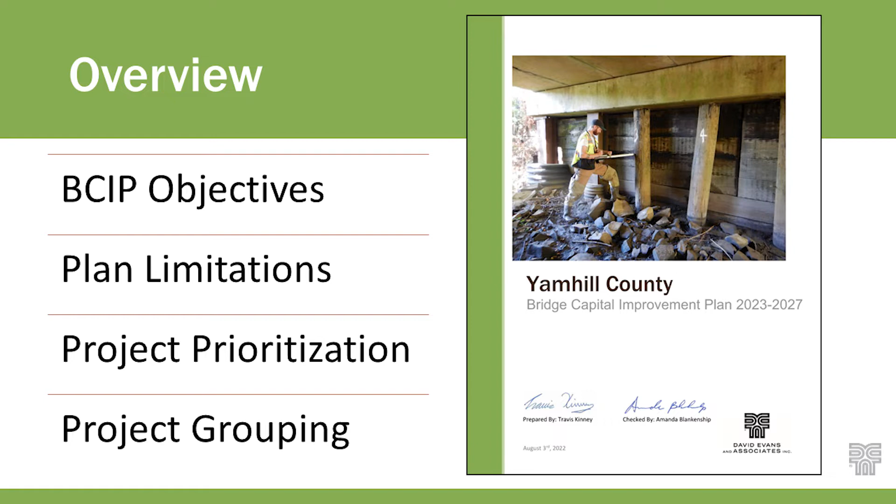As I mentioned, Yamhill County is a county in Oregon. They're actually nearby the office I work out of in Salem. They were able to be our guinea pigs on this.

Just on my soapbox here real quick, you don't really get rich as a consultant developing capital improvement plans. But for a lot of our bridge owners out here that are DOTs, you guys probably have a pretty robust programming unit taking care of all this, so it's probably not something you're thinking about a lot. But if you put yourself in those local agency shoes, a lot of times they're an army of one, or maybe they don't even have a single engineer on staff, and they're having to still manage all these assets. Local agencies own half of all the bridges in the country.

I felt really fortunate to be part of this, and that Yamhill County trusted us to help them with this. The way it came about is they were looking around and said, we've got to fix our bridges, and they weren't sure where to start. They reached out and said, hey, can you give us an estimate to paint this bridge? And I looked at that bridge and said, I don't really think you should paint that bridge. To be honest, I can give you an estimate, but I would prefer not to.

Can we talk about your project selection process? And that ended up being how we worked through it and said, okay, let's see if we can get a plan pulled together.

For a lot of the DOTs out here that have robust processes, I'd encourage you to reach out to your local agencies and consultant peers. I see this as a really needed resource for a lot of the locals across the country, and I use 'locals' broadly. I know there are some local agencies that rival DOTs, and some that are relatively small, running the whole gamut in between. So I'm not trying to pigeonhole that all local agencies need this kind of assistance, but I do see it as something that folks in this partnership could certainly help with.

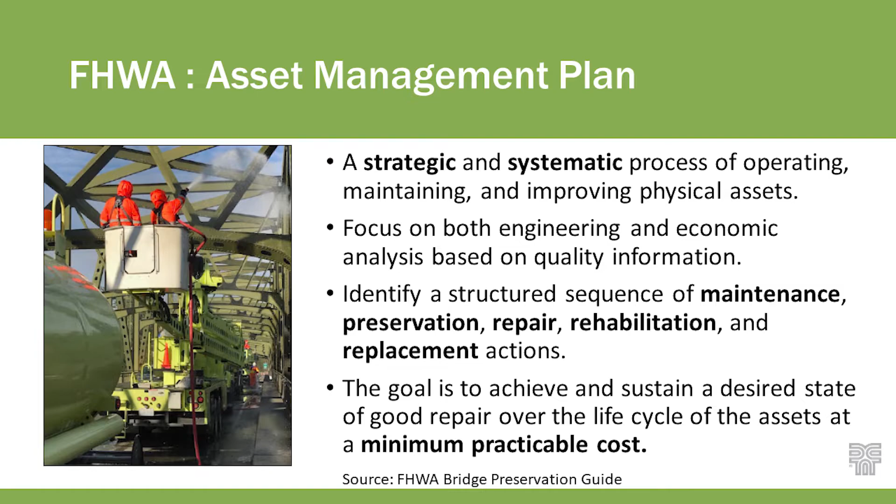Identify a structured sequence of maintenance, preservation, repair, rehabilitation, and replacement actions. You've got to have a balance between those, and I'll hit on that a few times. The goal is to achieve and sustain a desired state of good repair at a minimum practicable cost. We can all get behind that - I haven't heard anybody say, I have too much money, how do I get rid of it. And if you do, let me know, I could use that.

So here's the legs of an asset management plan: you've got your preservation, preventative maintenance, your rehabilitation, and your replacements.

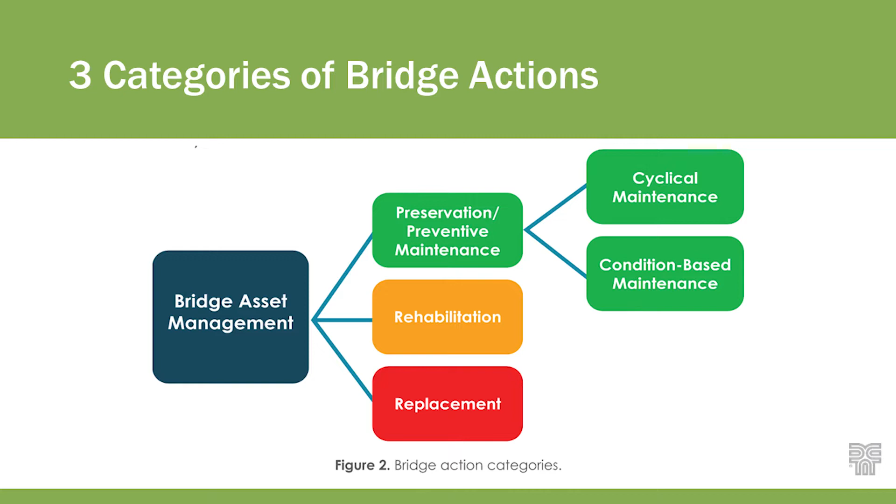Now, I know in this room, we really like to focus on the green one. In fact, we've even color-coded it in the good color of green at the top, and red, replacements, is the bad color. And then underneath the good color of green, we have the cyclical maintenance, and we have the condition-based maintenance. What I'm gonna say is, as we develop these capital improvement plans, you can't just spend all of your money on preservation, and you can't spend all your money on replacements.

And there's not a magic formula to tell you how to balance between the two, right? You gotta be able to look at the inventory and say, what are the inventory needs, and then how do I spread the funds out?

From there, we went and said, okay, what's the objectives? What are we trying to get through here? So we worked through with the county on this one and said, okay, we want to identify and address these highest risks of the inventory, right? This is an inventory that was a little bit neglected or had a lot of deferred maintenance for a while, and so there was some substantial or some significant risks that we wanted to get down in the near term.

We wanted to identify which bridges really should we stop spending money on, right? These are the ones that, boy, I could go and fix it, but there's still another 30 things wrong with it, and I'd just really like to see it go. And maybe we need to try and defer it for that replacement. How are we gonna prioritize these projects for delivery?

The purpose of this plan is to give you that long-term funding strategy, right? You're not looking at what can I do next in the 6 months, you're looking 5 years ahead, right? It starts to give you that longer range outlook. You have to have a plan that aligns with your available resources.

And so obviously this changes with every local agency or every bridge owner that's out there, right? You gotta have — if you have a plan that says you need $50 million to enact this plan and you have $5 million, you have $45 million worth of plan that's worthless. And so you gotta align with your resources.

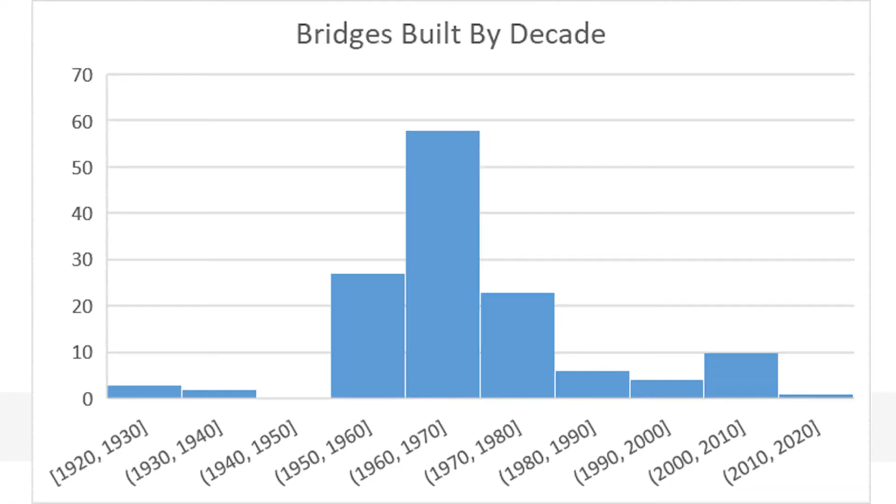This shows the number of bridges by decade. You can see that big hump there in the 50s, 60s, and 70s where they built a lot of their inventory during that time. And it's at that point where it needs a lot of work to keep it in service.

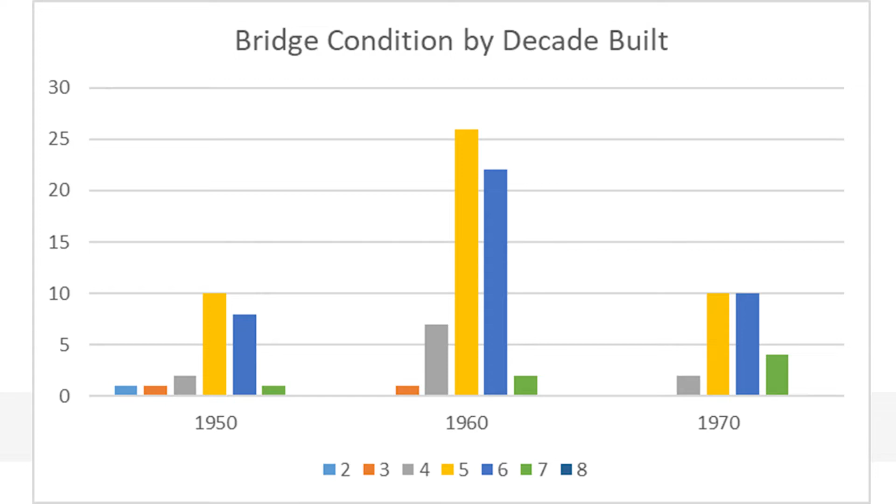We went through and started reviewing that, so that was kind of at the high level. Let's take a look at your whole inventory, but then you got to get down into the individual bridges as well. So we took that next step and started looking at inspection reports.

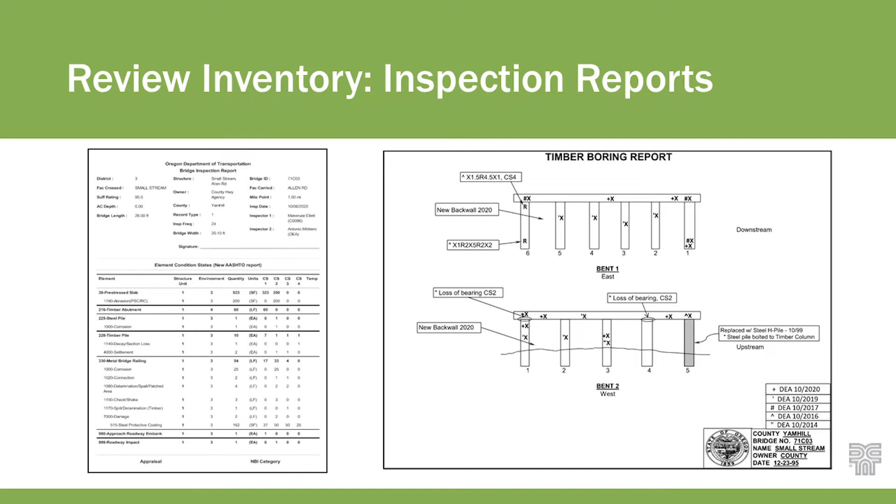And looking for those defects, timber boring diagrams - I have a lot of timber in the county - maintenance recommendations. I don't hear maintenance recommendations referred to a lot when developing asset management plans and capital improvement plans, but the inspectors go out and provide a great amount of information when they develop these, giving you a really good head start on some of these plans, some isolated repairs.

I was a little surprised at the volume. There's 613 total maintenance recommendations, and I was not really looking to go through all 613 of them. So we said, let's try and bracket this.

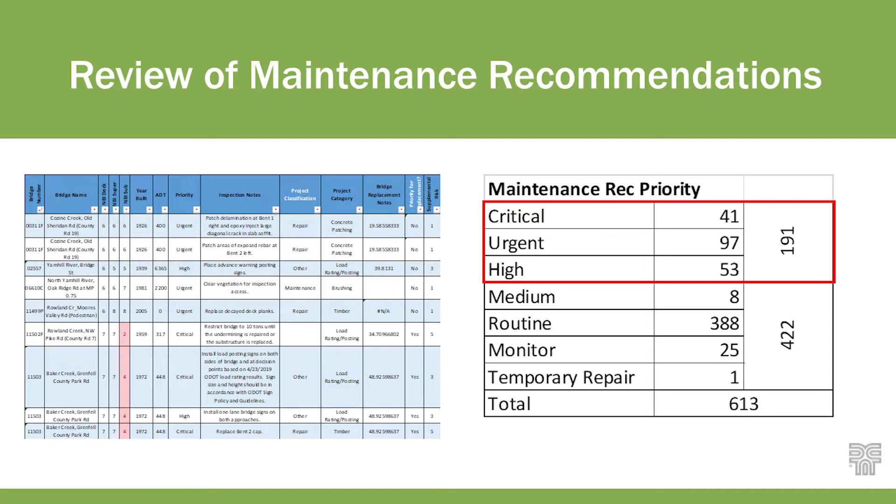What we said is, okay, let's look at these really critical ones. So you've got critical maintenance recommendations, you have urgents, and then in Oregon we break out routine into routine high, medium, and then just routine. The purpose of that is to give the end user of all that inspection data a little bit more granularity into what's going on in that routine inventory.

You can see that dropped it to 190-ish maintenance recs. That was a little more manageable. We said, okay, we'll go through those ones line by line.

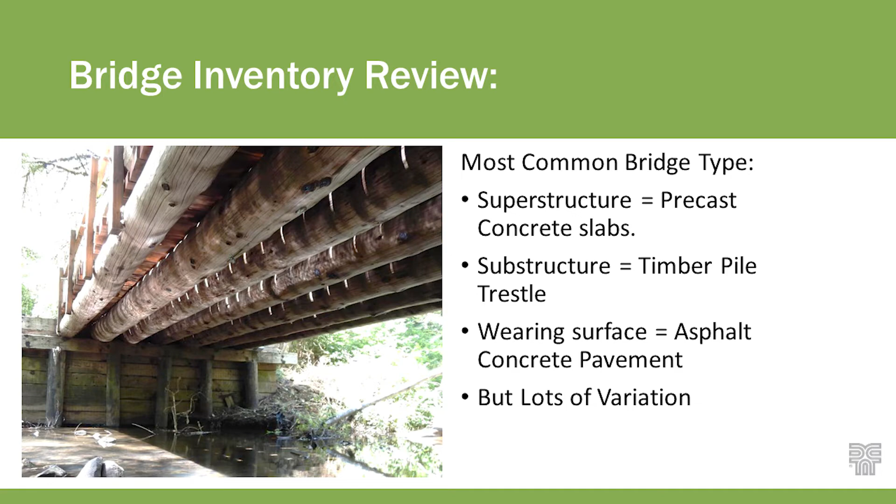But the most common bridge type is precast concrete slabs on top of timber pile trestles with an asphalt wearing surface, no waterproofing membrane. That was the bread and butter. Typically, the slabs have held up relatively well over time, and this timber substructure has not.

So that was kind of the bulk of it, and so we said, okay, well, I got 191 maintenance recommendations, I got all these different objectives of this plan. I'm still not down to a level of granularity where we can really pull together a tangible plan for them to take action on. So we said we need another ranking system to delineate between those 191 maintenance recs into a different kind of categorization. And so we went through that, assigned them a different risk-based kind of approach.

So if you have a whole bunch of urgent or critical maintenance recs, how do you delineate between which ones are the most critical versus the ones that are less critical? And so we went through that. This is a ranking relative to their population, and it's meant to kind of help rank between them.

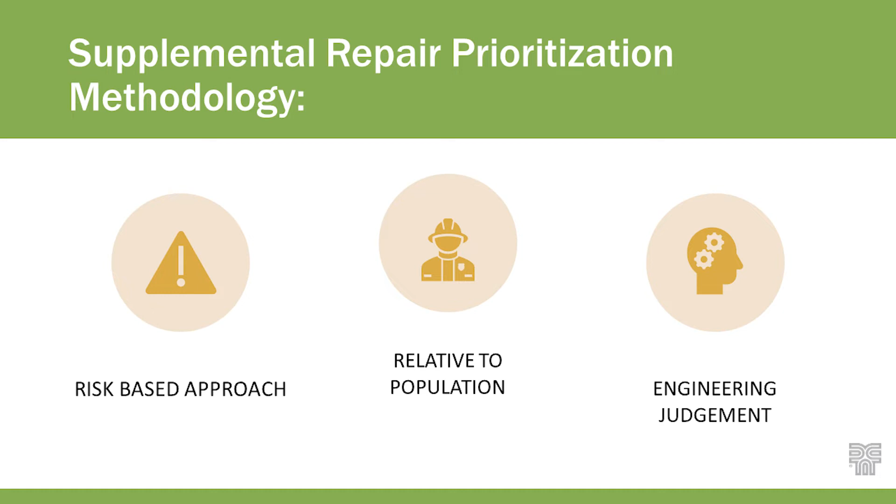So a 1 doesn't mean it's not urgent or critical, or that you don't need to do it at all. It's that it's the lower end of that particular population. And as I'm leading into this, a lot of engineering judgment went into this. Supplemental ranking was from a 1 to a 5.

5 was like, this is probably an immediate risk to public safety. It's not just a localized hazard. It could warrant a load posting. It could warrant something that needs to happen right away.

All the way down to a 1, which is not an immediate risk. A lot of these are like lack of inspection access - there could have been an issue there, but you couldn't see it because it was behind a bunch of blackberries. So it was like, well, yes, I agree with the inspector's recommendations, you need to clear that out. But it wasn't an immediate risk as far as that relative scale goes.

So we went through and sorted through those. You can see I went from 191 to 194 - if anyone's paying attention to the numbers, I just added a few as we went through there. But so we separated those out again, right?

And so now we're starting to get into a little more granularity. We got some ideas of, okay, these are the 16 that we want done right away, as fast as you can. And then we got these 25, 43, and others that we can start working into this plan.

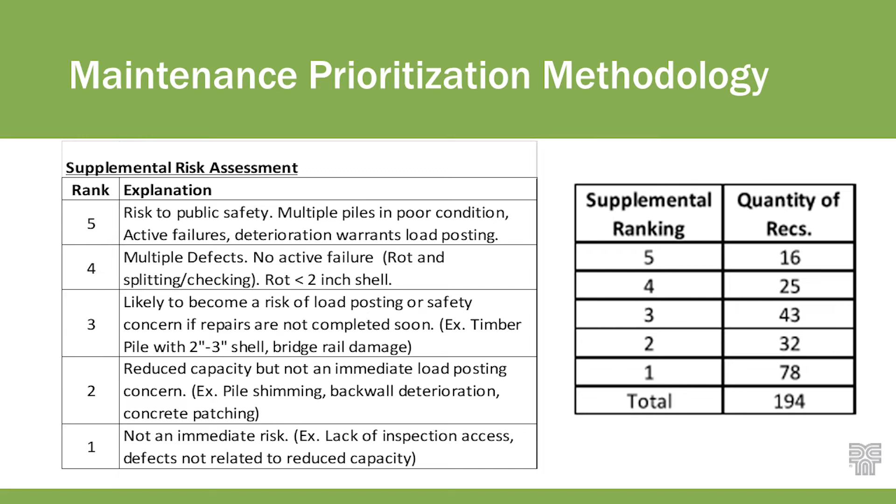What does a 5 look like? So this is a spread footing that has scoured out and started to have some actual signs of distress. You have this footing here, it's got these big diagonal shear cracks going here. The picture on the right shows underneath it, where you can put it all the way underneath. You guys saw the previous presentation.

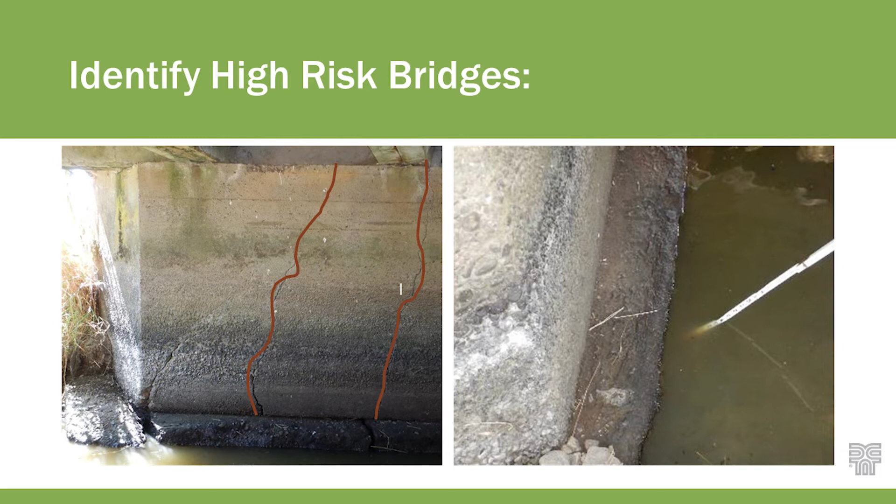I'm becoming more sensitive to scour issues lately, and that would be an example of a 5. Some other examples of that would be if you had multiple piles in a row that were really in bad condition - not just one, you have less ability to redistribute load.

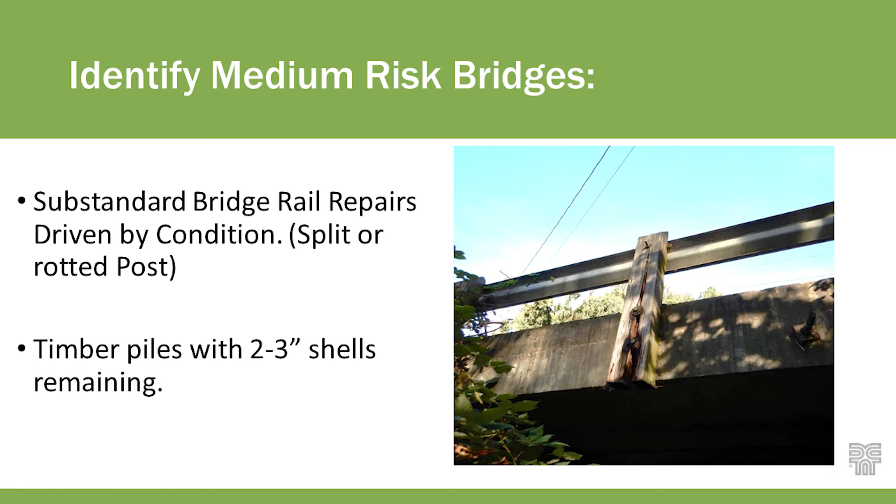A 3 might be more like you have a substandard traffic safety device - so you got a timber post behind a railing that's starting to fail, or you have a timber pile that's rotted pretty good, but not next to another pile that's rotted pretty bad as well. And then you get down to those lower risks like I talked about.

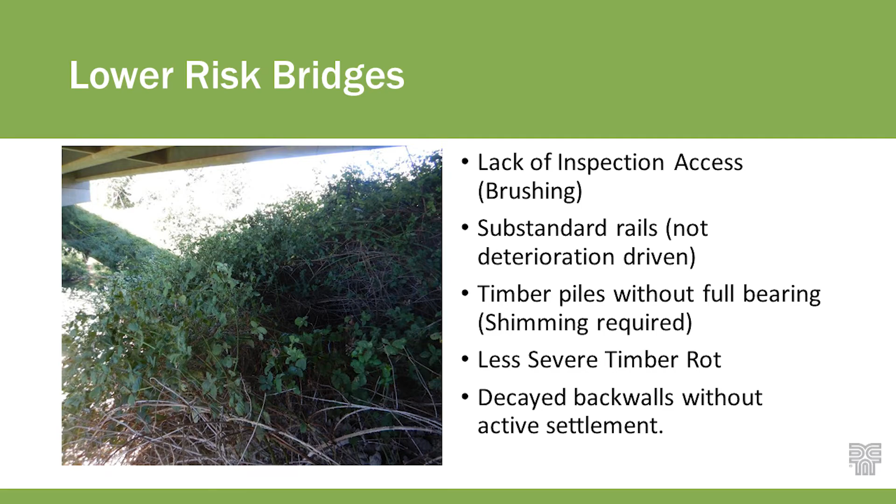So we got all those different rankings. I got a ton of data, I got a lot of spreadsheets going. I got to start getting into something that's actually useful.

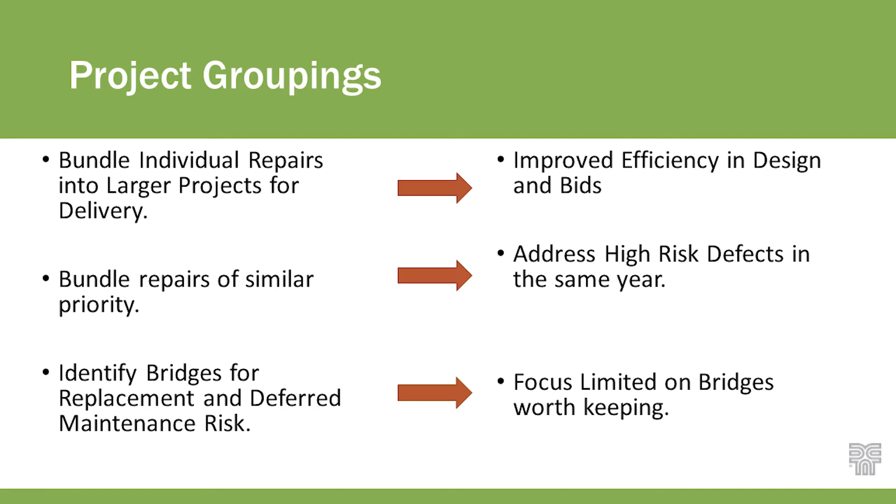And so we said, okay, let's go in and start grouping some projects here. There's 194 repairs that we're looking at taking place, in addition to some other global preservation kind of stuff that we're looking at. And so we said, you got to bundle these together, right? You got to start making them into larger projects.

You can't go out and contract one rail post repair, you got to contract 40 of them - then that makes more sense, right? You got to get some efficiency. So we started bundling projects together by their risk and making them larger projects so that you can get efficiency in both the design and in the construction bids.

Bundle repairs of a similar priority, right? If I got a bunch of 5s that I need to get out the door right away, put those 5s together of a similar type of work and try to address those as soon as possible. And then identify bridges for replacement, and assess the risk of deferred maintenance on that - if I got a bunch of bridges that I want to really replace in the next 5 years, I really want to take a hard look at whether or not we actually do some of these repairs or not.

Bridge replacements - again, this isn't a bridge replacement conference, but they're an important part of this. We recommended 5 bridges for replacement, and a lot of what drove this was taking a look at what it would take to fix this bridge and keep it in service. There's certainly traffic volume that played into it, and traffic volume was probably the largest factor because all the other bridges had similar other parameters you might use for replacements.

The maintenance recommendations - there were 49 maintenance recommendations on these bridges, 29 of which were very high priority.

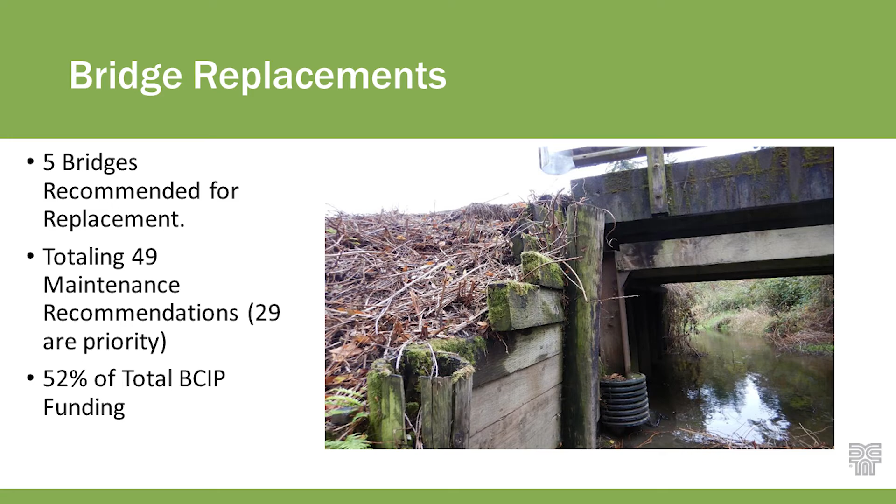Not only were some of these repairs expensive and widespread across the bridge, but you probably wouldn't end up with a great bridge when you were done anyways. So we said, these are the ones we want you to focus on for replacement. This is a picture of one where you can see repairs have been made before, and the actual approaches are starting to lean inward. To rebuild it, you'd have to pull off the slabs, rebuild the approaches, rebuild the substructure, and put the slabs back down. At that point, you've invested in a new bridge anyway, so we said, let's just replace it.

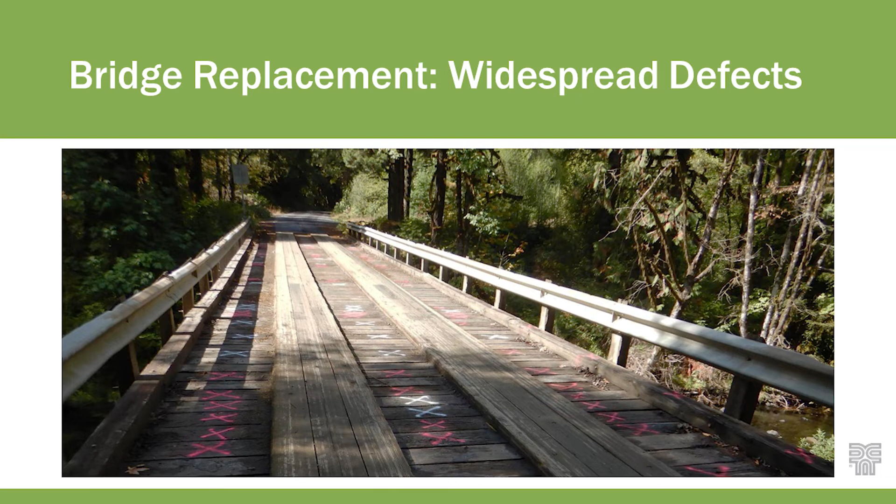Other ones worth replacement are when you just have widespread defects. This is a big timber bridge, and all these X's indicate locations of rot in the decking. If you go underneath the bridge, there's a whole lot of X's down there too. It's not that you can't maintain and keep this bridge in your inventory, it's that you're going to divert a lot of your resources to do so. So let's put it on the list for replacement.

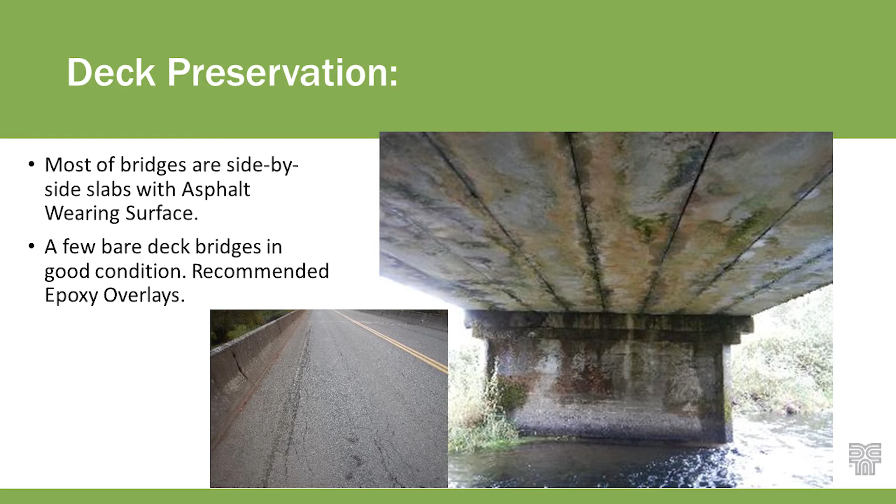It was funny listening to the previous presentation talking about not being able to find a bare deck. I thought, well, a lot of counties don't have bare decks, they use a lot of asphalt. And I also had trouble finding bare decks. I had assumed I'd be able to cherry pick a lot of deck sealing of concrete decks very early in the plan development—no one argues with sealing cracked concrete decks, it's inexpensive, a good life extension, and easy to contract. The plans for it just show the deck and you're done. It's easy, but there were hardly any—just a couple.

We found them and identified the ones worth actually installing epoxy overlays on. Here'd be a candidate for the epoxy overlay—you've got this very high value bridge on the right, it's in relatively good condition, it doesn't have a scour issue, and it meets current traffic needs. Let's extend the life of this.

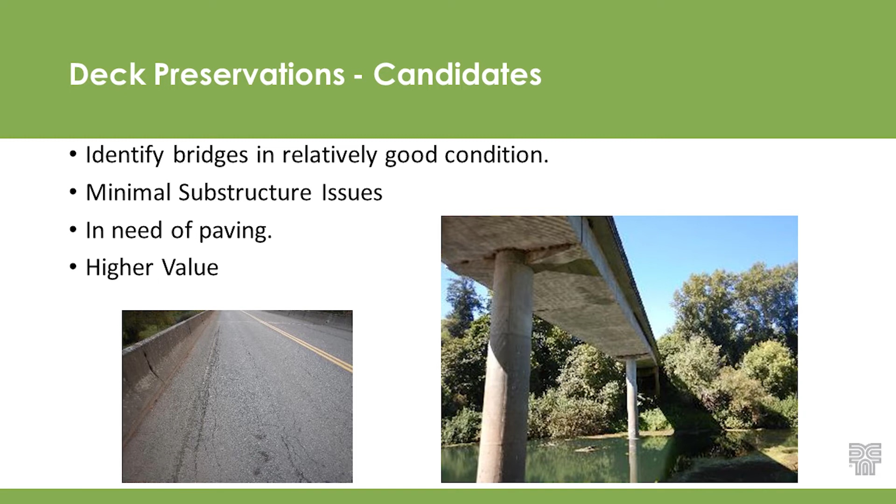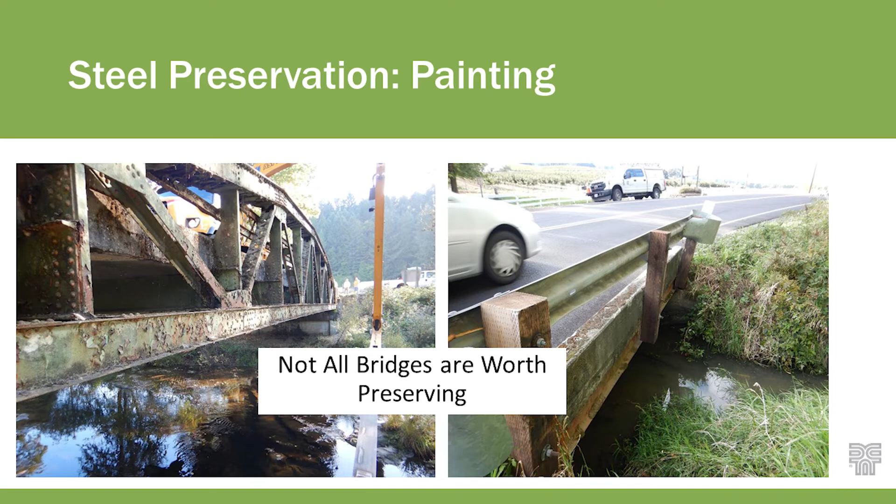Steel preservation—again, thinking in my old hat, I said I could easily find some steel preservation to include in this project, cherry picking some easy big dollar value items to throw into this capital improvement plan. We went through and looked at these. The picture on the left is a pony truss with serious deterioration—it not only needs painting but a lot of steel rehab, but it goes to a dead end road with almost zero traffic volume. So we looked at that and said I don't think that's a candidate for preservation; you need to look harder at whether that bridge even has to remain in the inventory.

Then the bridge on the right has steel girders underneath—would anyone want to paint that bridge? It doesn't make any sense, you'd just pull it off and put in a new bridge. It's very small, and the cost of painting it outweighs the cost of replacement. So when it all came down to it, we had to come back to the county and say, I know we were supposed to flag bridges for steel preservation, but we didn't find ones that made sense. Now, they do have some bridges that make sense for steel preservation—they've just been painted fairly recently, so they don't need repainting in 5 years. So we did flag those and hand those on. We felt better about that, but we just came up short.

Scour repairs were a really big part of this capital improvement plan. There are 24 scour repairs recommended, put into 5 bundles totaling $2.3 million, which is 23% of the overall plan.

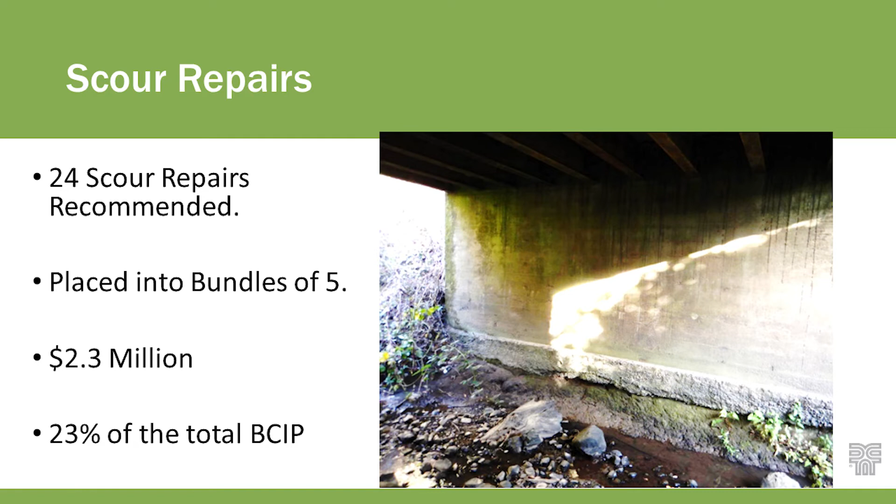Timber repairs and preservation covered some of the most significant repairs I talked about. The crew was actually comfortable replacing timber and had the technical skills to do it, so we carved off a lot of the highest priority repairs and had the crew handle them directly. They weren't included in the capital improvement plan because they had separate crew funding for that, so we carved those off and put all the other repairs into bundles.

I wanted to get preservation on here too. You can extend the life of timber quite a bit by putting in these little borate rods. Credit to Chris Keegan for this photo, I stole it from your presentation, it's on the TSP2 website so I figured it'd be okay. This is what it looks like when it was done.

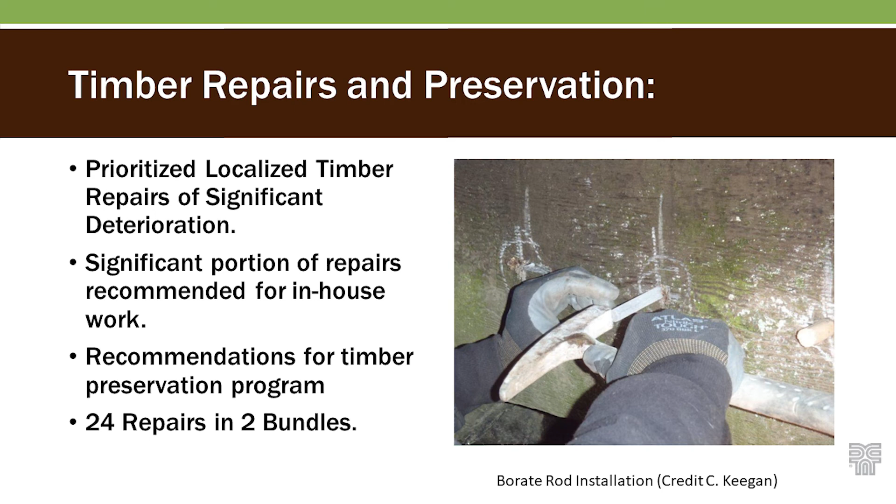There was a report written up to give context, but you have all these different project bundles. They range in that $300 to $500 thousand range so they're manageable to fit within a $2 million total contract for a year, and big enough to get a contractor interested enough to give you a bid that's hopefully reasonable.

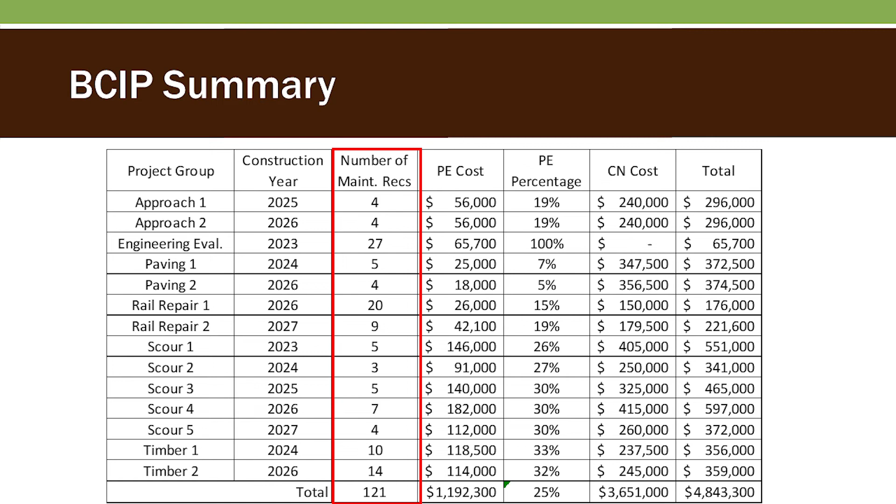Once all this goes through, 121 of these really high priority maintenance recommendations will be taken off the books. So as an owner, you've addressed an awful lot of your risk on your inventory by doing this. A lot of this is preservation work, right? You're extending the life of the bridge, taking care of high risk defects, performing scour repairs.

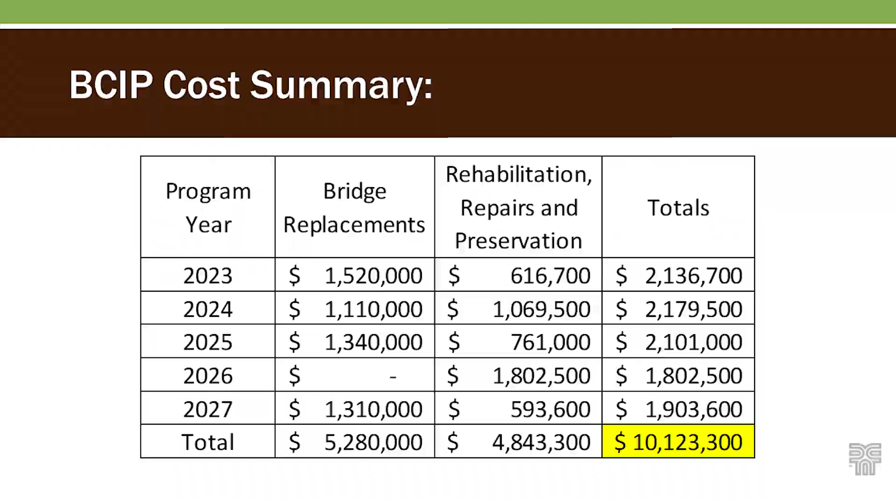Add in the replacements, add in the preservation and rehab projects, and you end up at about $10.1 million total, about $2 million a year. Actually landing right on $2 million is kind of hard, and I didn't want to force it because the level of detail in our estimates isn't quite that refined.

So, monitor and update. We had a section there to remind them this is very dynamic. This is a 5-year plan, but after 2 years it probably needs to be updated and rethought, because things change quickly.

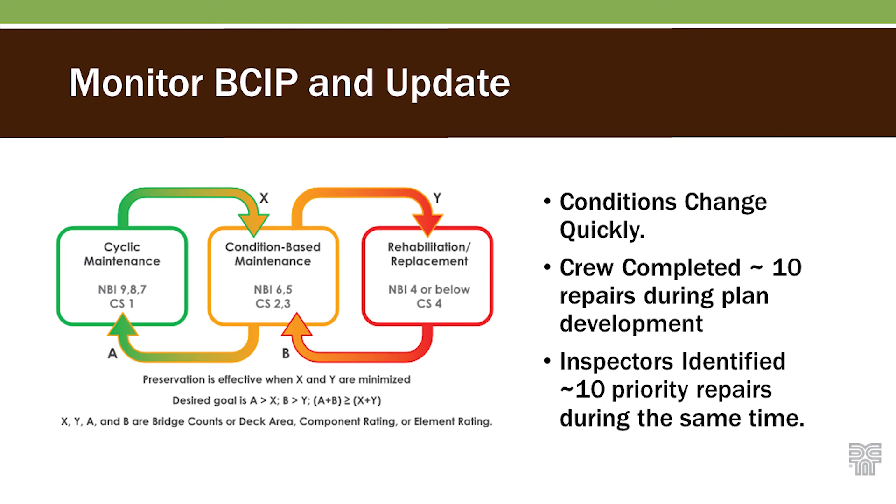In fact, as we were writing this up, we gave a draft list to the bridge crew and they knocked out 10 repairs right away. They were excited and ready to get going, it was fantastic. The inspectors found 10 more repairs to add before I was even done with the plan. So I was like, alright, I've got to get this turned in really quick or it's never going to end.

So just a quick summary: we developed a 5-year plan at $2 million annual cost. We did break out PE and construction. We were shooting for that balanced approach, and in all cases we want to avoid worst-first.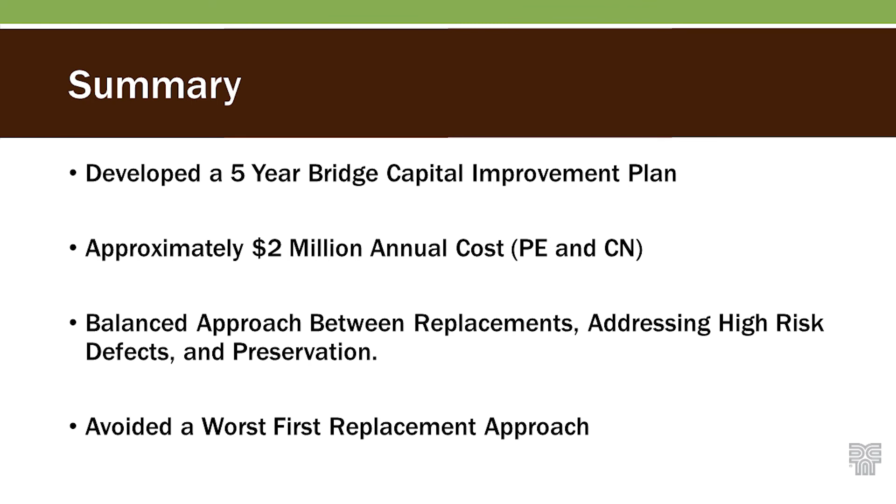I actually asked about worst-first replacements. I told the county, if you want me to just identify replacements, I could list off 7 big bridge replacement projects and that's the entire plan, my work's done. But I suggested balancing it would work well, and they were fantastic to work with.

Greg Hafner and Mark Alago with the county gave permission to give this presentation here today, and they were great to work with. So, does anyone have any questions?

You mentioned bundling within the county. I'm curious, we're trying to promote bundling external to the county, county to county. Have you or any other agencies been able to accomplish that?

Getting an IGA together and having multiple counties work together on their resources, that's a fantastic idea. I am unaware of that being done, but it's certainly something we can take up with the local agency working group, because you get a lot of efficiency with it, right? You turn that $300,000 project into a $3 million project and get a lot of good bids.

One comment on that, we're trying to do that in California, not successful as of yet, but Kansas apparently has a real good model where FHWA has a guide on it, and they basically sponsor it. It's like a lottery, they put the projects together and then fund the projects. I thought it was a great concept.